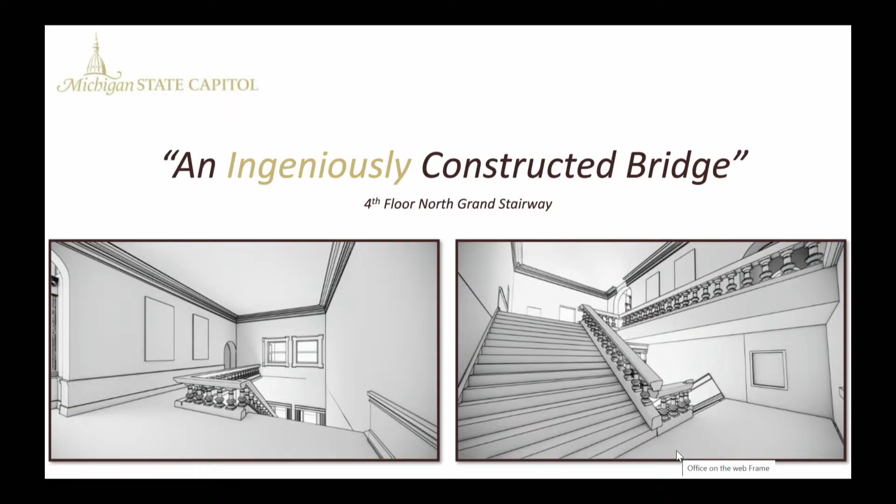This is in reference to an article from when this space was first altered in the year 1900.

Looking at the space to start off, this is a little difficult with the current scaffolding project going on for the ceiling up there. What you see is a photo of the South Grand Stairway and a photo of the North Grand Stairway. Not exactly a photo—this is a sneak peek at our HBIM, which we're developing with Quinn Evans. You'll see the two spaces look vastly different. One is a big, grand open stairway; the other is about a fourth of the stairway you can see today.

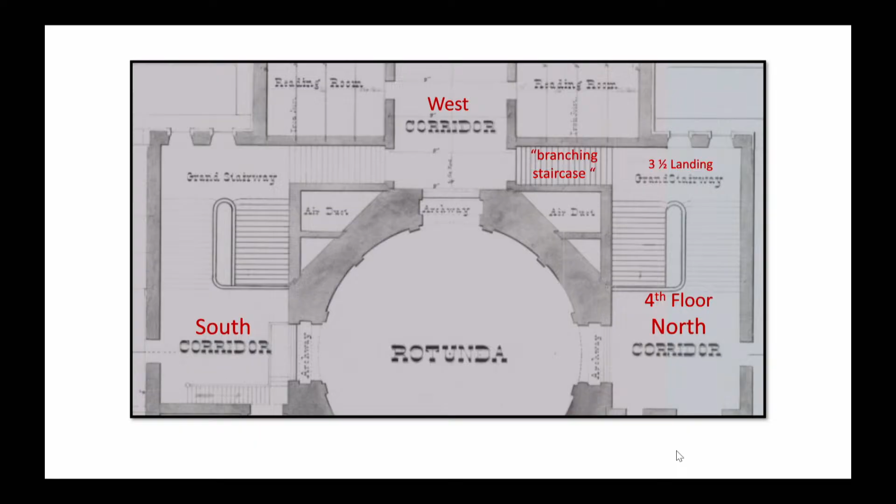But it wasn't always this way. As Barb mentioned, Elijah Myers was prone to symmetry. So what you see here is the South Grand Stairway on the left-hand side and the North Stairway on the right-hand side, from the original 1870s plans. Each stairway has a major staircase leading up to the fourth floor south and north wings, but they also have a branching staircase up to the west wing, marked as the branching staircase. I'm going to show you a lot of floor plans today—they're all oriented the same way, with west at the top and north on the right.

This is a look at the west wing. I'm going to focus a bit on the west wing because it plays an important part in the story of the north stairwell.

The fourth floor west wing, for the first 20 years or so, belonged to the state library. The state library had the largest singular room in the Capitol—it stretched from the second floor of the west wing all the way up to the fourth floor. Visitors on the main floor could actually look straight up through the open ceilings and see the ceiling of the fourth floor. So the fourth floor west wing originally was the top mezzanine of the library.

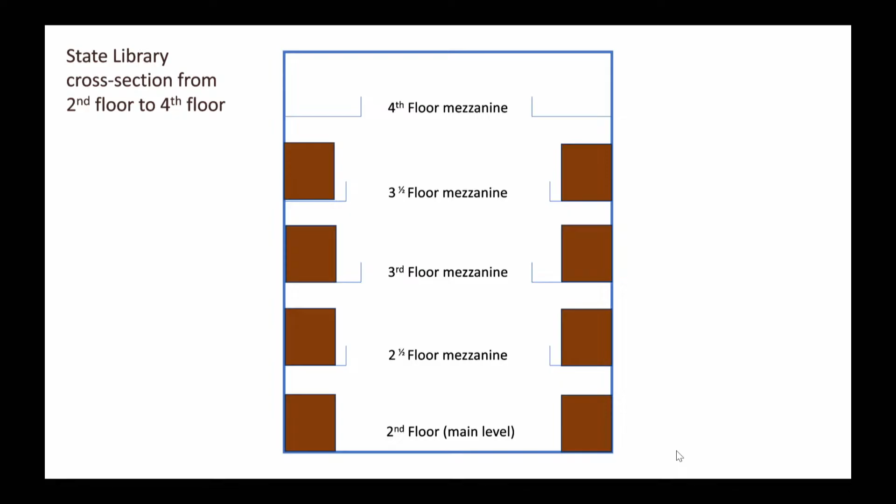Looking here, you can see a cross-section of the library space, with mezzanines at each half-floor level featuring large, beautiful walnut bookcases, like we've constructed on the ground floor of the exhibit room today. But the fourth floor was a little different. Back in the early days of the Capitol, we worked with a very crude ventilation system—just letting the hot air rise through. This gigantic space was left very humid and very stuffy, and there was nothing they could really do about it.

So we think the fourth floor of the west wing was mainly used for reference space for working lawyers, as part of the law library. Maybe it was used for temporary book storage, or some book packing for the traveling library program—but nothing too permanent up there. That meant that in the 1890s, when space started to get tight in the lower levels of the building, this space was up for grabs.

In 1898, the Board of State Auditors—the overseeing body of the Capitol early on—ended up giving half of this fourth floor mezzanine, as well as those two reading rooms, to the Supreme Court, and they were converted into four offices for four of our justices back then. What this meant, though, was that you now had four Supreme Court justices, along with all their furniture, records, books, and visitors, moving into this space on the fourth floor west wing.

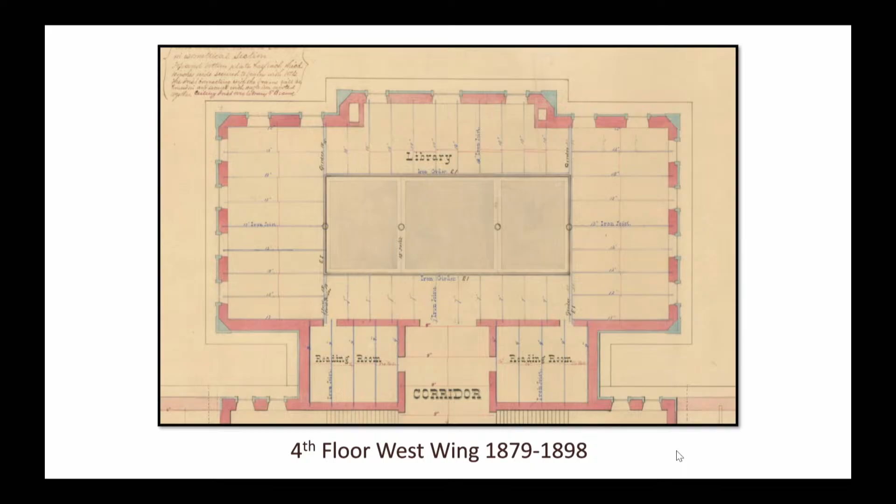Looking back at the north stairway, one of Elijah Myers' few flaws for the building is that he created a west wing on the 4th floor that was only accessible by stairs. So justices had to go from their chamber on floor 3, climbing that long flight of stairs up to their offices. Construction crews trying to make their offices without a working elevator had to bring all their stuff up the stairs. You also still had aged Civil War veterans working in the building at this time, having to climb those flights of stairs as well.

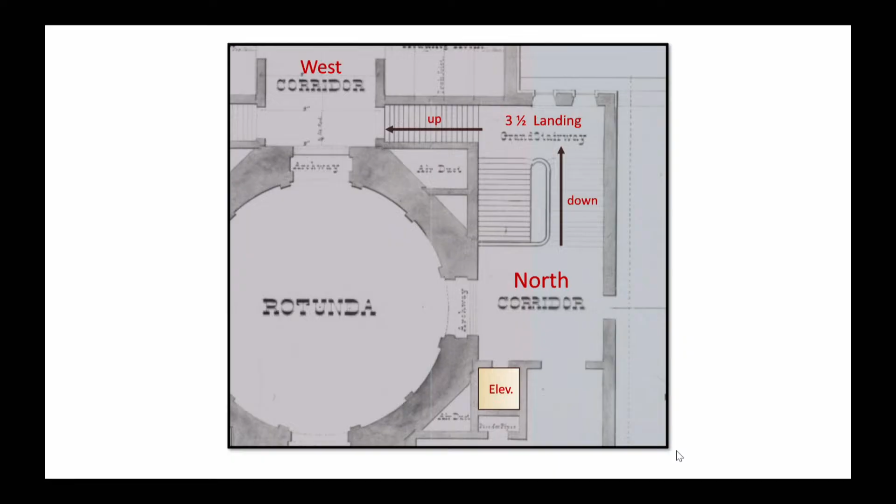So in September of 1900, the Board of State Auditors contracts with famous Lansing architect Edwin Bowd to construct a bridge that will connect the elevator, which was back then a steam-powered elevator in the same shaft where our North Rotunda elevator is today, to the west wing. They're going to build a bridge over that north grand stairway. You can see the article from December 15th, 1900: an ingeniously constructed bridge has been erected on the 4th floor of the Capitol, starting from the elevator landing and reaching, by a right angle, the rear corridor leading to the law library, where those justices are. It clings to the wall for its entire length and is protected by a railing along its outer edge, which overhangs the stairway. Here you can see a plan of it.

Unfortunately, plans for the Capitol are rather sparse. From the early days up until about the 1940s-1950s is when we have our next set of plans after the original plans from the 1870s. But looking at a plan from 1941, you can see the bridge has been constructed. And this is another look at it, showing the connection over the stairs, over that 3.5 stair landing, over to that west wing.

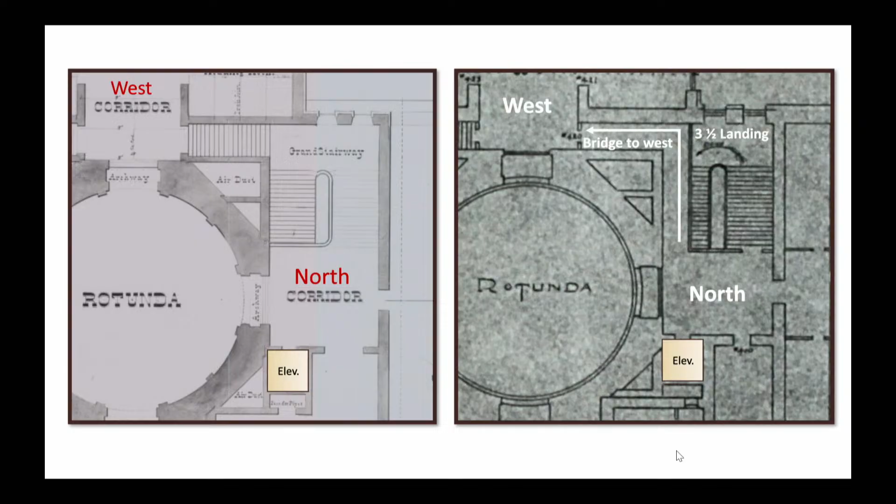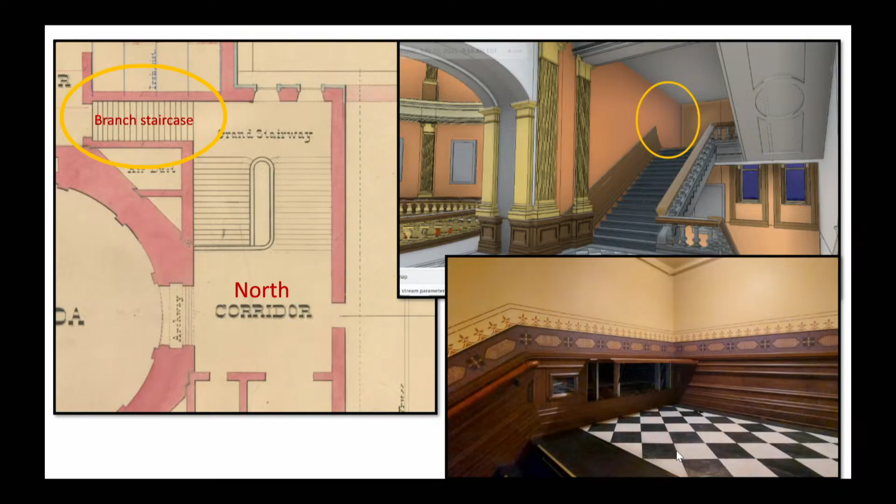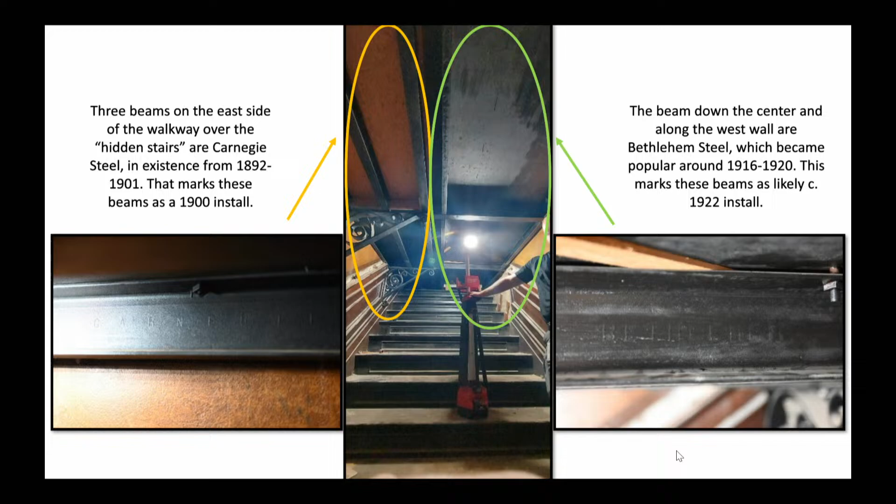Now, because a bridge is built over that staircase to the west wing, it's deemed a little bit useless. So when you open up that wainscot, you get a good look inside at that hidden stairway. There's a couple things I want to look at here as you crawl into the stairway and investigate a little bit. First off, you'll note that the beams up top, below the bridge, below the walkway on the 4th floor, are actually marked with their makers.

The 3 beams on the left-hand side are marked as Carnegie Steel. Carnegie Steel was in existence from 1892 to 1901, which puts it right in line with that 1900 construction date we saw from the article. The beams on the right, though, the beam down the center and the beam along the right wall, are marked as Bethlehem Steel, which really saw its heyday in the 1920s.

Another curious feature of this hidden staircase is the artwork on the walls. You notice it's a rather crude paint job. There's a really good chance that behind this artwork is the original artwork that we all know and love from every other corridor in the Capitol. But maybe, I theorize, at some point they were painting over these walls with a new paint scheme, and they put on their first layer, and then they got word halfway through that they were going to hide the staircase, so it was kind of for naught to finish it.

Another curious feature in the hidden staircase are these really beautiful decorative scroll supports. These scroll supports, you'll see, are only holding up the left half of the walkway above. This makes you think about a couple things. First off, if the staircase was truly meant to be hidden originally, these decorative scroll supports are kind of useless. Also, since they're only holding up those Carnegie beams, the 1900 beams on the left, and not the Bethlehem Steel beams from the 1920s on the right. And then also, those supports are a little useless if those perpendicular beams going across for the cross load are Laughlin steel from a little bit later on — you don't need those decorative scroll supports if those perpendicular beams are in place from the get-go.

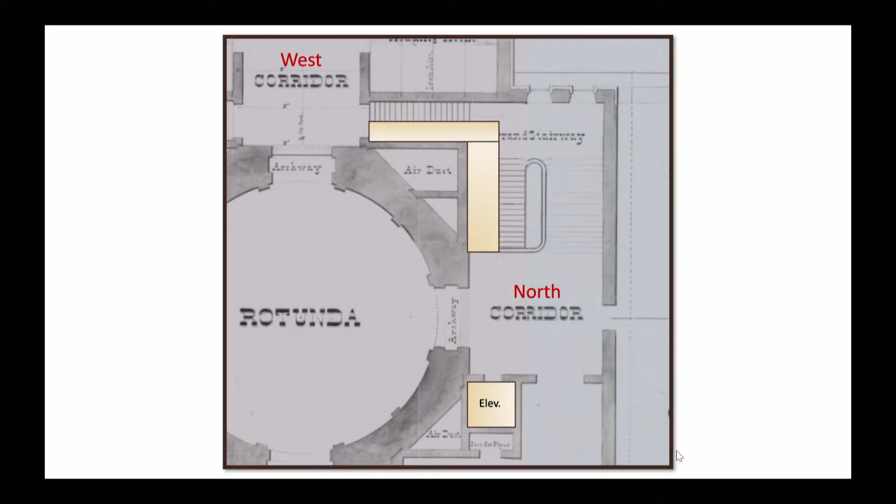Those Bethlehem beams from the 1920s line up perfectly with a major remodel that happens in the West Wing in 1921. That year, the State Library moves out of the Capitol, and the West Wing we're currently in is remodeled. That's when the open ceilings from the second floor to the fourth floor are filled in.

So the floor below us and the floor above us are installed in 1921, 1922. With this major remodel, the fourth floor above us is turned over to the massive Department of State. In the 1920s, as automobiles are booming, the Department of State has the job of storing and handling every vehicle title in the state in large bookcases, all paper back then. We had 160 to 170 Department of State employees whose main job every day was to climb up ladders and store and retrieve all these vehicle titles.

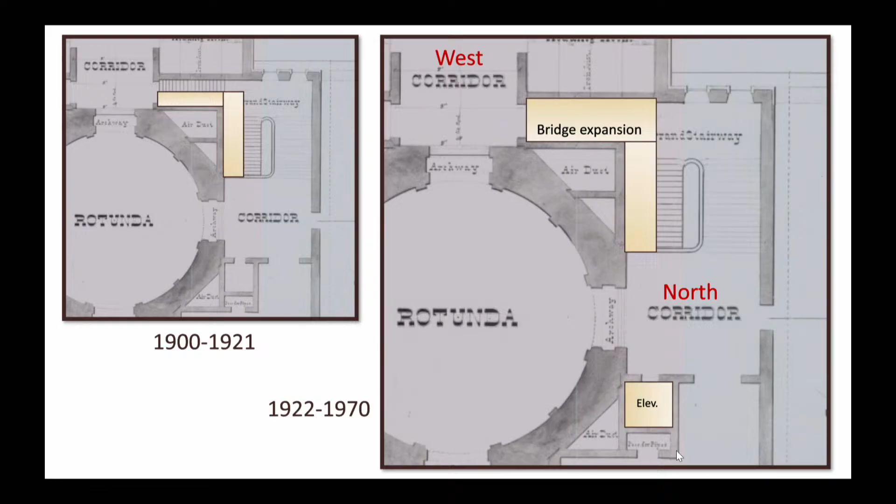With the installation of all these large bookcases and 170 feet stomping up there every day, I think in 1921, as this is being built or converted over, that's when the bridge over that hidden staircase is expanded to the walkway we have presently, going from the north wing to the west wing. It stays that way until 1970, as we can see in floor plans from 1941 and 1957, where that bridge is still present.

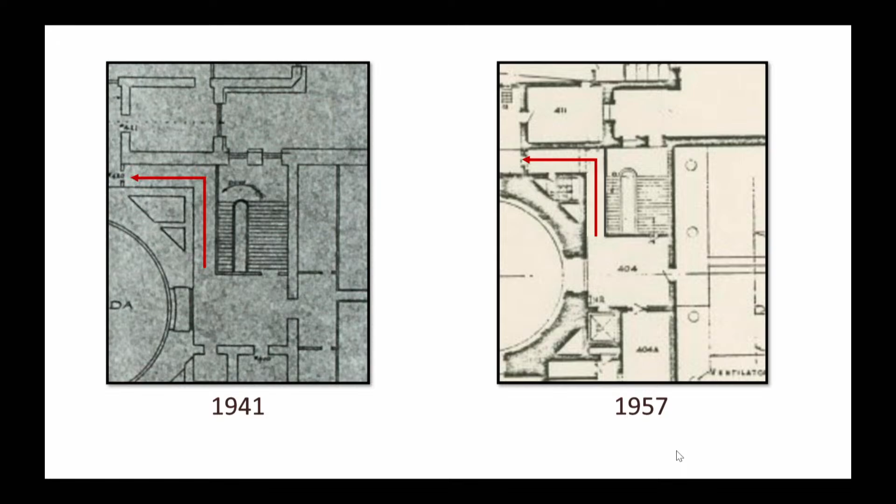In 1970, though, in the midst of major overflooring and remodeling throughout the entire Capitol by the House and Senate, the bridge over the north stair is extended to the point where it is now. When you think of the fourth floor north with that staircase and the iron rail, that entire corridor is modeled like that in 1970, except it was a little different because they had installed two offices up over that staircase.

The photo to the right is actually a photo inside of office number 1, over the first of the two hidden stairs that Barb showed you, where she stuck her phone in the wall. It sounds a little strange, a little frightening, but it's not actually the first office we've ever had built over a stairway.

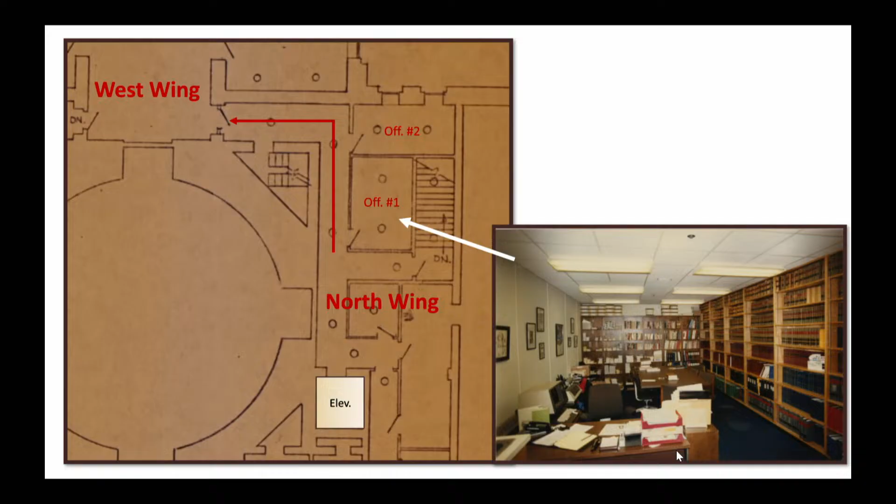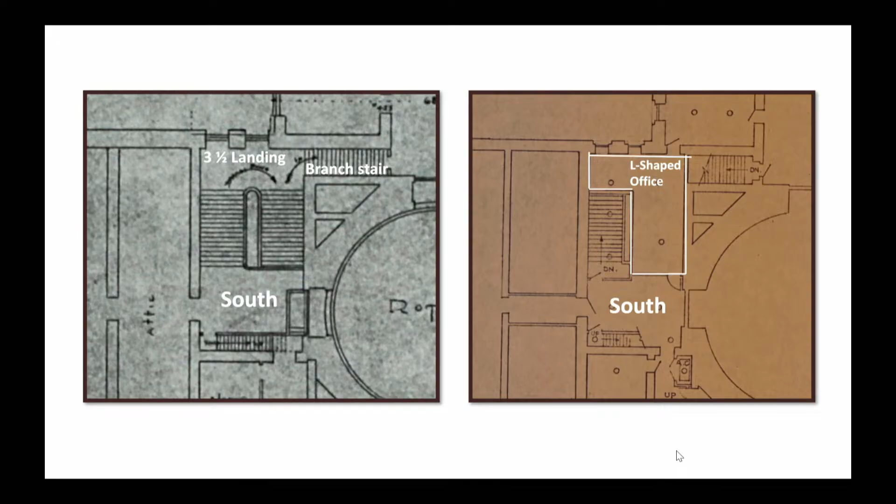It's also not the only hidden stairway we've ever had. Going back to the north stairs, except down on the second floor level, back in the 1970s we had a corridor constructed from the second floor west wing over to the House document room. This went over the stair landing at the 1.5 level on the north stairs. If that sounds confusing, I'm right there with you - it's really hard to imagine.

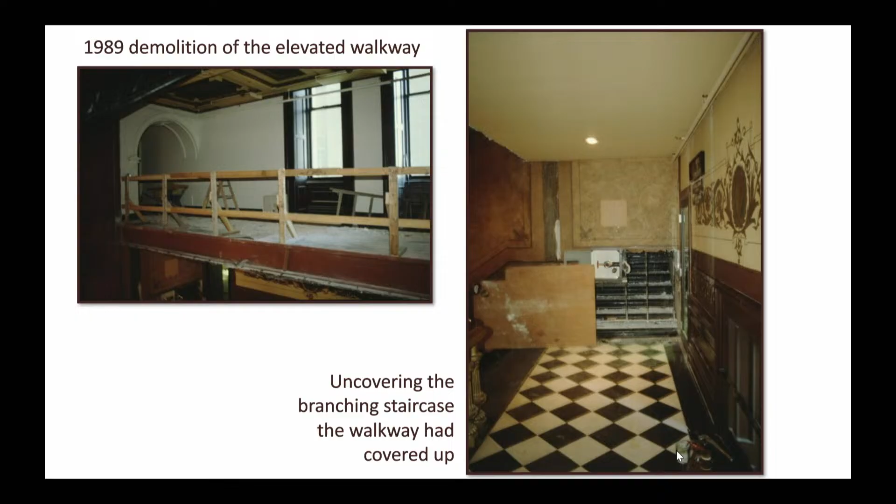I'd like to finish with Quinn Evans. Back in January they put together some proposed layouts of what this space looked like with that 1900 bridge installed. So this is just a look at how it looked in 1900.

To me this is really important. It opens up a lot of interpretation opportunities for us, thinking back to ADA. It was important that we fixed one of Elijah Myers' flaws, where he had made a west wing that was inaccessible besides stairs, so it's important to have that bridge to the elevator. It also tells us this was one of our first overfloors. In a Capitol with 80 years of overfloor installations, this was one of the first, and it tells a big story of modifications and alterations to our Capitol.

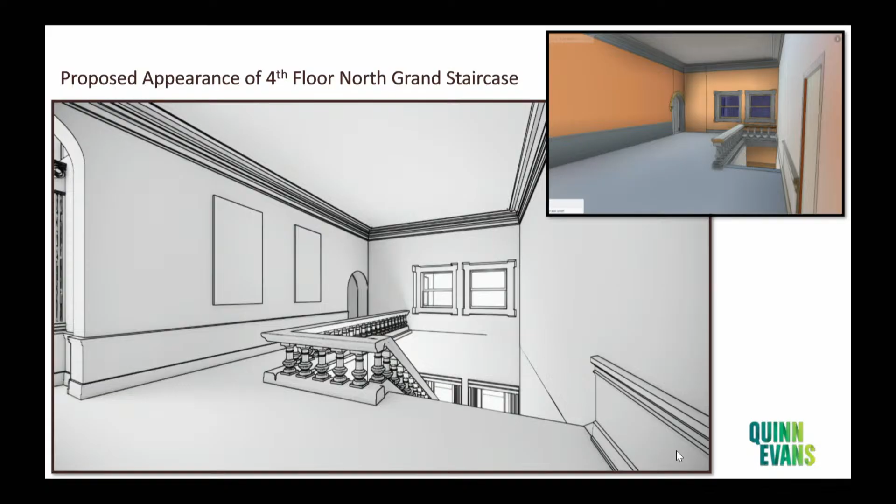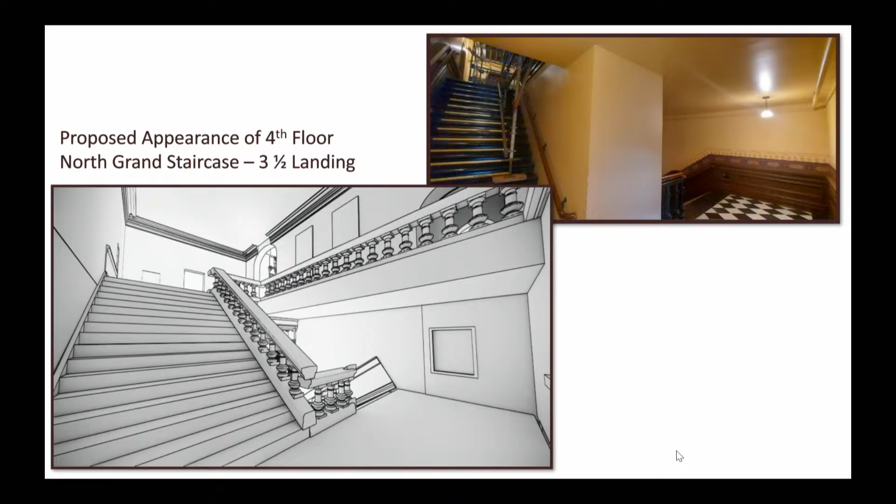I'm going to give you one more peek here. This is at the 3.5 landing on the stairs, and the hidden walkway, or hidden stairway with the wainscot that opens up over to the right. It's much more pleasant, more harmonious with the south stair we have up on the 4th floor too. So I'll finish there. Open to questions if there are any.

Thank you so much, Brian. Any questions?

The only ask I have of the commission, there's no vote for this today, but as we move forward, we would like the opportunity to open this back up and bring that view back, which we think is well-deserved to this Capitol building. I already have the numbers and the plan that we could start this project in the summer of 2026. It shouldn't interfere with many of the activities in the building, but since we are manipulating architecture and not just doing repair, I would like the commission to vote on this at our next meeting.

So I'll bring this up again and give you an opportunity to review and discuss. Chair Bill Candler is already aware of this project; he and I have had a discussion. So I'll leave it at that, but I am open for questions right now.

Commissioner Hodge? Thank you, Madam Chair. Not a question, but more of a comment, maybe a recommendation.

I'm a history minor, so I can kind of nerd out on this stuff all day. This is really exciting. I'm excited for you guys to have this opportunity and look forward to seeing what you bring back. My only recommendation is that next time we kind of go through this, let's take a tour, walk around and actually see it. The first grade teacher in me kicks in, I want to go touch and feel and see this. This is exciting work. I could tell when you were presenting that you were excited about it, you were in those stairwells. I want to be there too, right with you on that. So that's just my one recommendation.